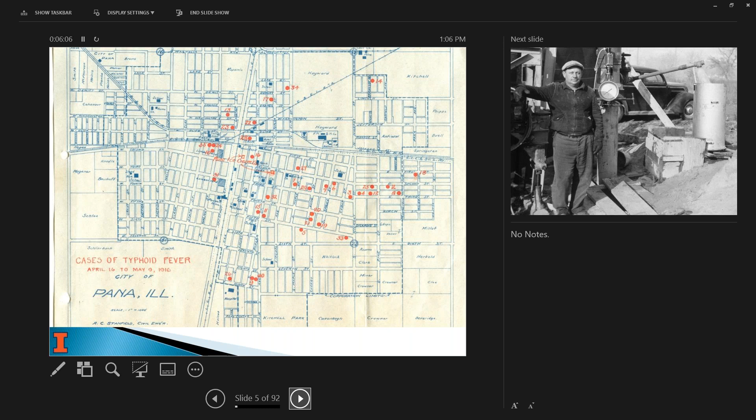And this particular thing, we investigated whether it was that half the system was sewered and the other half wasn't, or if it was their water system because they had a new treatment plant and they didn't put it online. And it turned out it was the Pana Ice Cream Company, which also sold milk. Back in that time, everyone went to one large vat, if you will, and used a shared bucket to get milk. And that's what caused the outbreak there. And all of that's identified in their files still today.

Just some other examples. I'm also in charge of our data management and outreach at the Water Survey, and we've been going through our files and scanning a lot of old photos and things that were happening. We've been involved with pump tests. Here we're using an orifice bucket to do a pump test, going back all the way into the teens.

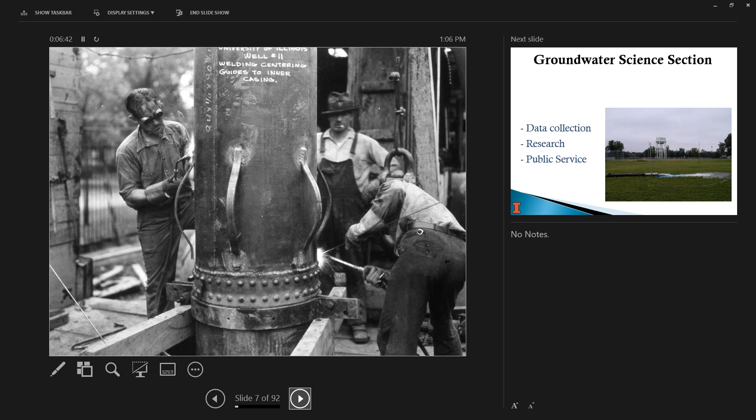This is putting spacers on in a well at the U of I in the 20s. A lot different job back then than it is today. Look at all those rivets and putting those on. So it's a different world today, surely, but we've got a background in that, and we still do pump tests and things like that for folks.

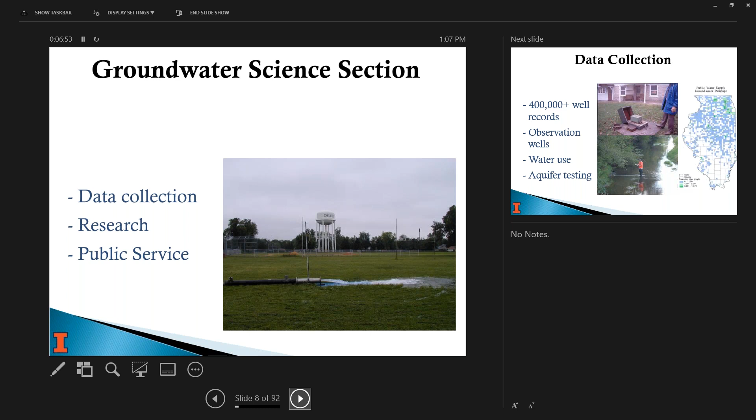I'm in the groundwater science section, so we not only collect data and do research, but we also provide public service. We house the state's water well logs, and so we have over 400,000 well records for the estimated 800,000 or so wells that are out there, both municipal and private. We also have observational networks where we monitor wells.

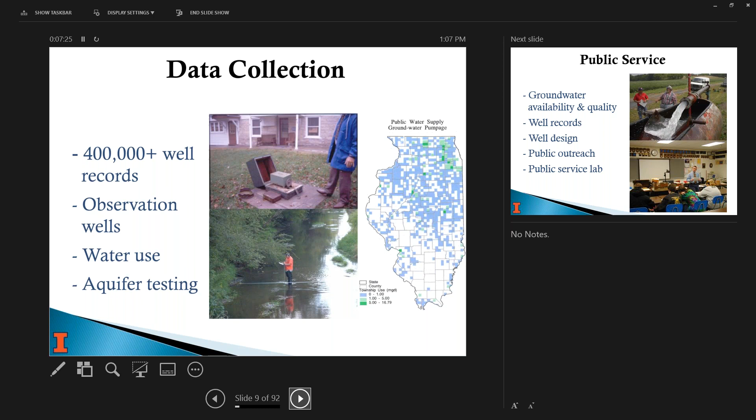We work with a lot of the communities in Illinois that measure their own water levels, and they provide that data to us. Illinois has a water inventory program that requires every municipal water supply to provide their annual water use to us. And we also provide services like aquifer testing and other things to help communities. We model, we do pump tests, a lot of public outreach.

And then on the research side, I mentioned modeling. Contaminant studies. The head of our section is a geochemist and has been involved in a lot of interesting groundwater work in that respect. But we look at well interference issues. We do aquifer assessment studies for communities and areas where they may want to put in a regional supply and things like that.

So we're in the game, if you will, and we run wateroperator.org through a grant from RCAP, the Rural Community Assistance Partnership, and it's funded through US EPA. And the goal behind wateroperator.org, and I'll get into that later, is to provide resources and support for systems under 10,000. And those tend to be the ones that are more out of compliance. And so on our side everything's free and publicly available. And the idea behind it is we're here to be a resource for you all as operators.

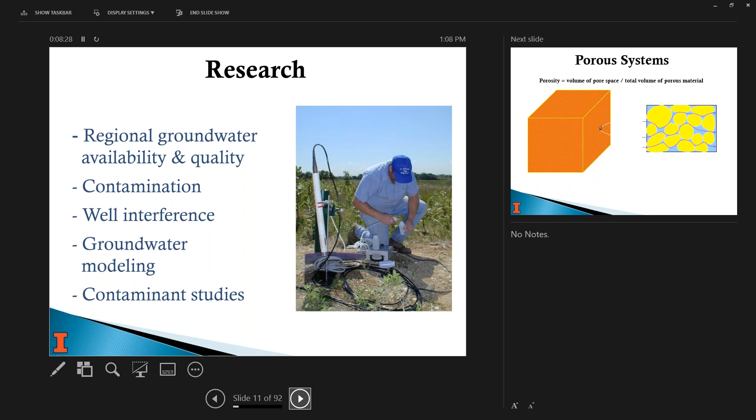So we're going to do a little groundwater 101. A couple things I want to explain. I work a lot with private well owners, as I mentioned. What's important is that you need to understand your well and your well system and the geology at your location where your well is well enough to ask the right questions, make sure that you're doing the right things, that you're not spending money unwisely for your community, all those things.

And so understanding the difference, for instance, between a porous system, which is sand and gravel, in an aquifer, and a fractured system is one of those issues, whether you have a bedrock well or a sand and gravel well. So a porous system like this, and this is just a diagram explaining that porosity is the amount of airspace between all the grains of sand in a sand and gravel aquifer. And in an aquifer, all those pore spaces are filled up with water.

So a really uniform sand may have a porosity of 30%, meaning 30% of that volume is actually water. So put that in real terms, if we have an aquifer that's 100 foot thick and it's full of water, whether it's artesian or whether it's water table, if you took all the sand away, you'd still have 30 feet of water over the entire expanse of that aquifer, which could be multiple counties, very large.

So sand and gravel aquifers are typically very productive. And that's why we see a lot of irrigation wells that pump 1,500 gallons a minute or so in sand and gravel, a lot of times in sandy areas along river bottoms and things like that.

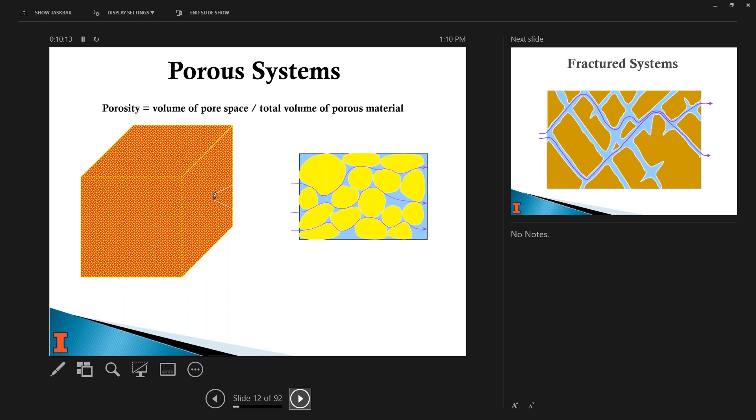So the difference with a bedrock well is sandstone has some secondary porosity where you may have some water in the actual rock, but for most fractured systems, most types of bedrock, the water's flowing through the cracks and fissures in the rock. It's not actually flowing through the rock.

So you can look at it like it's pipe flow, but it means two things. One, there could be much less water available because it's just in the fractures. And it also could mean water's coming from further away to get to your well if you're pumping at a high capacity, if there's only a few fractures.

I worked with a bunch of irrigators up in Kankakee County, Illinois, and you could tell on an aerial photo by where the trees were growing where the fractures were, because it was pretty close to the surface and they had enough water in those places. And they knew where to drill their wells for irrigation just by sight,

and they tried to line them all up on those fractures, because if they missed... I had one guy who told me he had his well, he called it his Cadillac well. He spent $55,000 on it for an irrigation well, and he only got about 40 gallons a minute when he was looking for 1,800, I think. So understanding the differences in fracture flow if you have a bedrock well, those things are important.

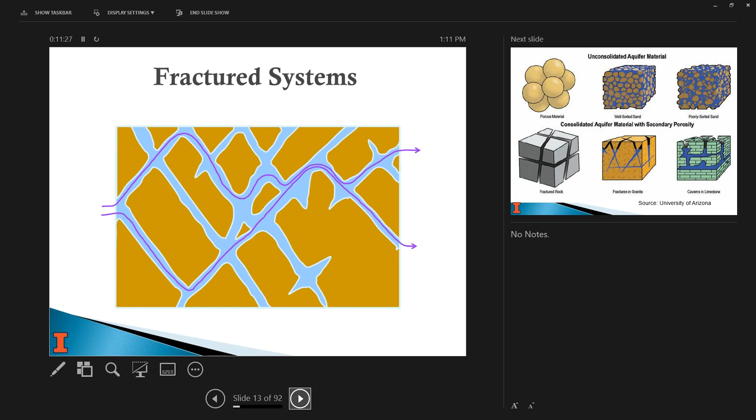So along all of our river systems, a number of communities have their wells in those sand bottoms, and that's alluvial sands. They tend to be graded by size because the bigger particles fall out first. And so at the very top of an alluvial aquifer, it's usually pretty fine sand. And sometimes, every time there's a flood, some of that can shift.

The porosity, if you will, there is less than 1% in some cases, whereas in Kentucky, Tennessee, all the areas with karst and dolomitic limestone, Mammoth Cave, all those places, sometimes you can have very large crevices in that rock because water over millions of years has eroded it away and created these large pools, filled tubes in the ground.

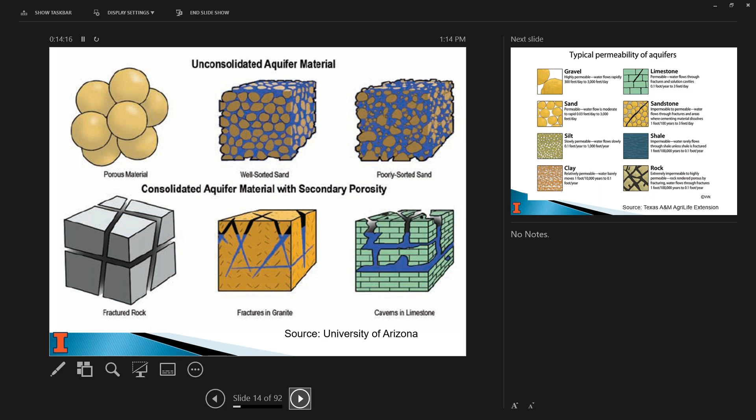And what's happened, like in Pike County, is they put in a regional water supply, and they supply water to a lot of areas, even out in the country, to private homes. So permeability is the other thing after porosity that is a big issue.

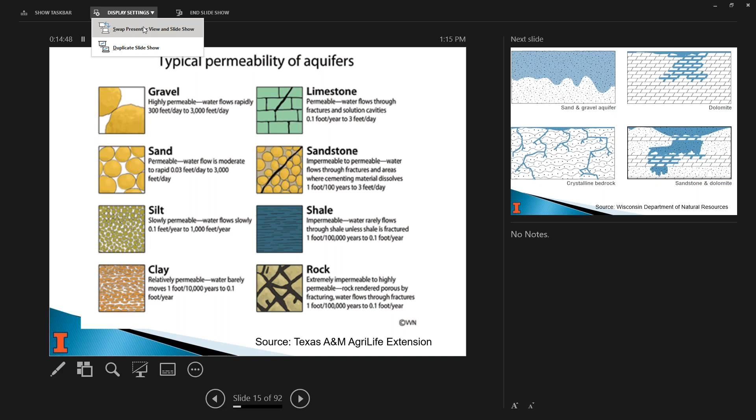Okay, Steve, I pause you for a second. Yeah. The screen that we're seeing right now as the audience is your PowerPoint's notes section. So I think you need to switch your screen so it shows the actual presentation rather than your notes. Oh, well, thank you for telling me. Right there. All right. Oh yeah, look at that. So one of the ways we've tried to alleviate the fact that I didn't have audio yesterday for a minute and a half was we moved upstairs to where we can hardwire our connection. So I'm not on my normal setup, and there's a second monitor hooked up, and clearly we had it on the wrong one. Thanks for telling me. Okay, sorry about the issue there. Does it look good now, Hideyuki? Yep, looks perfect. All right, thank you.

Okay, so permeability is the other factor that can affect how much water is available to your well, if you will. And so it's kind of a measure of velocity. It's not actually velocity, but it's similar in that it's measured in, here, feet per day. It's how fast water will flow, which, you know, the water flows based on head difference, it's pressure. So for the same kind of sand or the same jar of sand, if the difference in height of the water from point A to point B is more, the water will flow faster.

But highly permeable like gravel, it's because it's got large pore spaces and it's easy for water to get through. So as it shows here, it can move as much as 3,000 feet a day. Interestingly, silt and clay towards the bottom on the left side are also highly porous. They can have as much as 20 to 30% water in them, but the particles are so small, they're so hooked together, if you will, that in a clay water flows 1 foot in 10,000 years, or could flow that slow. And so those are considered not aquifers, but aquitards or aquicludes, because they prevent water from moving freely through those units towards a well.

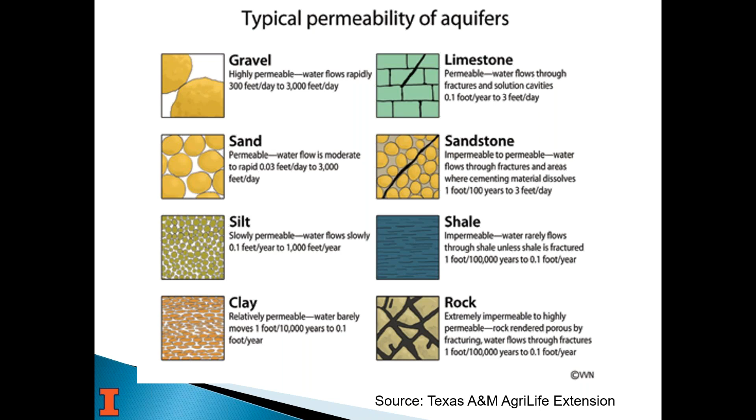And so we drilled through till that's so hard that the driller thought it was shale, and we hit bedrock and it turned out it wasn't. But shale is basically impermeable, and it acts as a barrier to water flow vertically down if there's an aquifer below that. And so recharge to a deeper aquifer below shale typically is really low. And so it's coming usually from the side somewhere at a distance away from the well. Okay.

These are just some basic examples. I show this because it gives you an idea of, if this was a horse trough full of that material and you poured a bucket of water over it, this is the wetting front you'd see going down through the material. And it's really just to show that in a sand and gravel, water's kind of just free flowing between all the grains.

But in crystalline bedrock, the granite, it's only going to flow through the fractures. And in the real world, this is still a simplified version with the sandstone and dolomite. Because the sandstone has secondary porosity, it may have some flow that's more sand-like, but you usually don't have just that one unit.

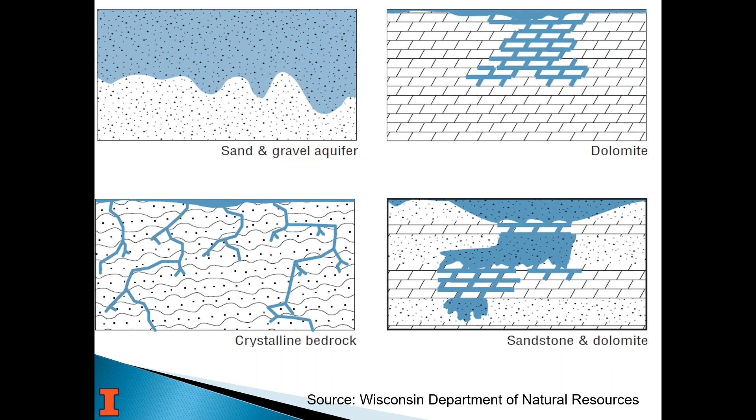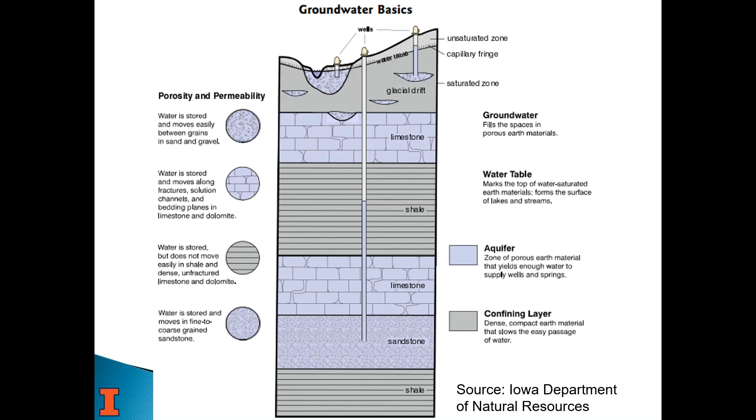And that's the other thing. A lot of times, whenever you get into bedrock, sometimes you're finishing a well in multiple units. And that can be a problem. Sometimes one of those units has a different water chemistry than the other.

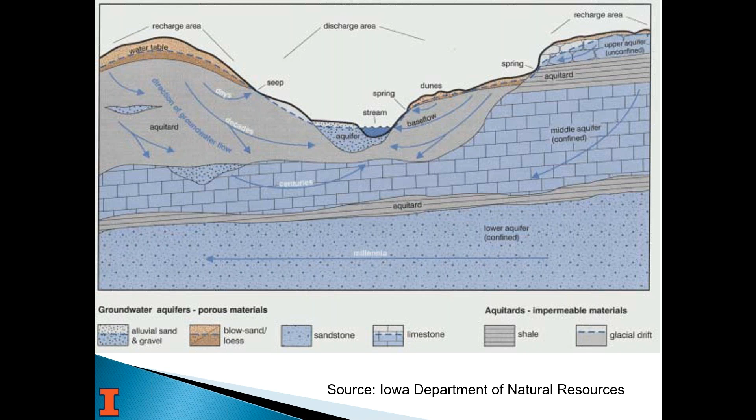And some of you, I'm sure, are aware of where those are if you're in a sandy area and you've got groundwater protection areas in some places. But this is a good overview of the type of time frame it takes for water to move through the system, depending on how deep it can get and those things.

So a little bit about, and I debated whether or not to talk about dug or bored wells. Obviously, none of you as community water supplies have dug or bored wells. But this is also in the class as well; the original class we developed was originally for non-community water systems, which many times are very small systems, a restaurant, a campground, where they may have a dug or bored well. And since those folks might be on this, I decided to include it. Plus, it's good for you to know the differences.

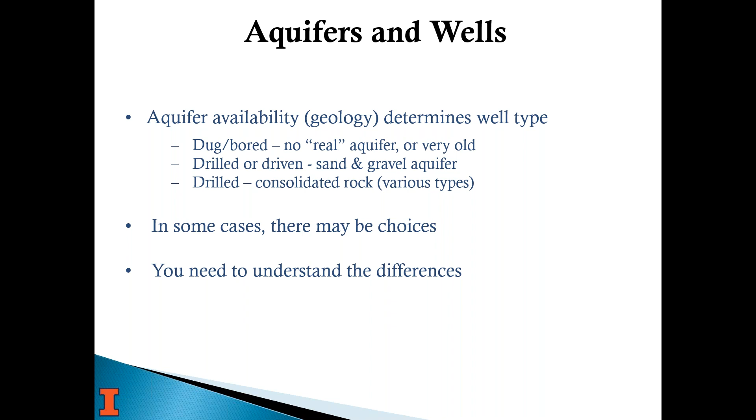So, it really depends on your geology. You may have choices. Champaign County, where I live, there are at least 2 sand and gravel aquifers at different depths before you hit bedrock. And then you can also put a well in bedrock if you wanted to. Most people do not do that. There's no reason to go that deep and spend the extra money. But anyway, it really just depends on where you're at, but understanding the differences is important.

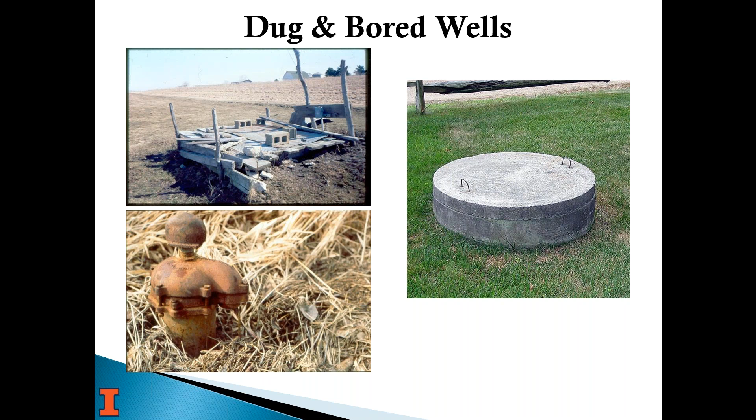And we see a lot of, in the upper left picture, really old hand dug wells that are still in use today. And the biggest problem with those is they're not up to any kind of code. And so if they're close to anything else, they can be a source of contamination.

Here's two examples. The picture that had the concrete tile on the top is the one on the left, and the one that looked like a normal drilled well is the one on the right. But down below, they're 3-foot diameter, usually 36-inch diameter. Sometimes now they're put in with Teflon, but they're meant to store water from the water table. So water's coming in from a pretty shallow place.

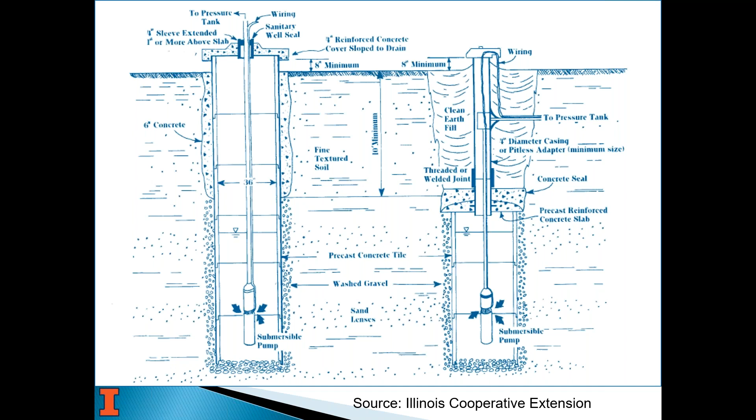As far as sand and gravel wells, the real issue here is if you have a sand and gravel well, your water's coming in through a screen. And if you have a bedrock well, it's more than likely open hole. So the difference is for a community well, maybe you have 20 or 40 feet of screen, where a private well may only have 4 or 5 feet of screen, that's the interval where water's coming into the well.

So the wells like Illinois American has here in Champaign County for Champaign-Urbana, they've drilled down, and I think they're 40-foot screens. I'm not 100% sure, but those are at, say, 200-foot depth. And so water's only coming in from 160 to 200, and the rest is solid pipe above that. The screen size is based on the drill cuttings and the actual aquifer material, what size sand or gravel might be there. And that's usually determined by the driller whenever they're putting in the well.

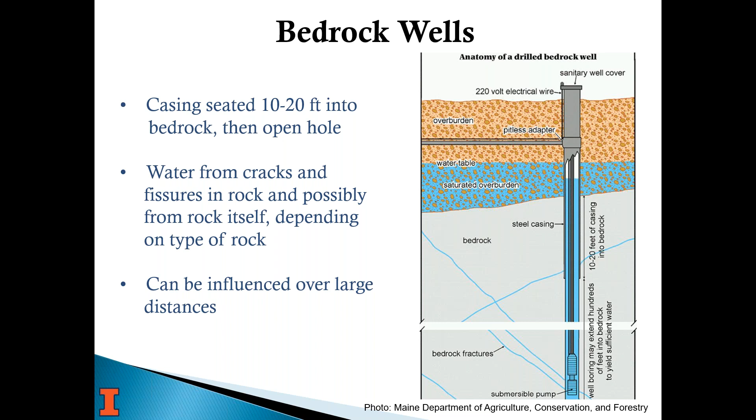What that means too, though, is if it's not well fractured, or there aren't a lot of interconnected fractures, the water may be coming from just a few fractures, and that means it's probably coming over a longer distance. So your chemistry can change, or some of these fractures may head towards the surface. Depending on your geology and how much overburden you have, it's good just to understand some of those risks. And I know as community water supplies, you're sampling frequently, so you're probably aware if there's any of those issues.

I've seen wells in New York State, before they had to meet code, that maybe have 15 or 20 feet of casing, if that, and they're 300 or 400-foot wells, but the bedrock's right at the surface in some areas. And so we see a lot of contamination in some of those bedrock wells, even though if you ask somebody, they'd say, well, I've got a 500-foot well. Yeah, but it's drawing water from 15 feet below land surface.

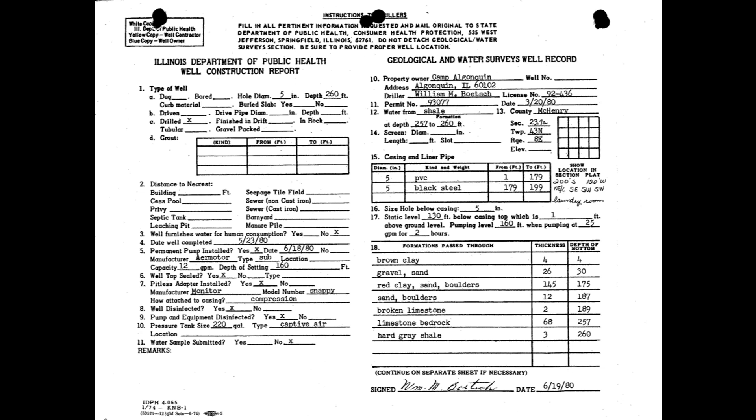I don't want to show Illinois per se, but it's a good example. So there are resource agencies in your state, whether that be your state geological survey, DNR, DEQ, a lot of different names, or even your USGS state office, that have mapped, monitored, and studied the aquifers in your state.

And as they melted, boulders fall out first, gravel falls out next, then sand, and then silt and clay. And then another glacier comes along and it deposits a second level and then a third level. And so these buried bedrock valleys that used to be rivers are now full of sand, and they become our major sand and gravel aquifers. And that's going to be true in any glaciated area of the country. So the northern third of the country, if you will.

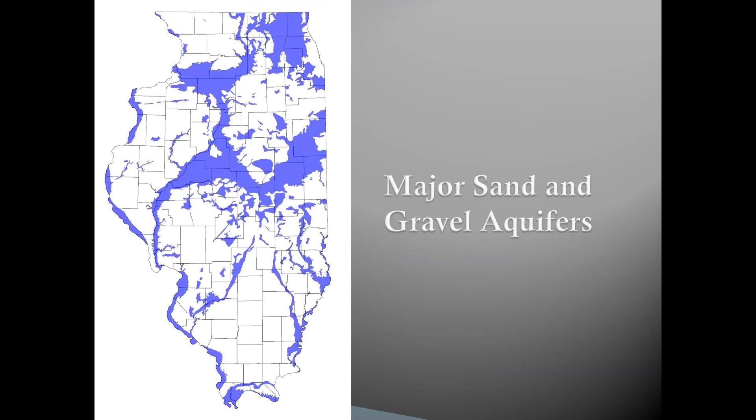Otherwise, the only other sand and gravels would likely be along river bottoms today, where those areas have alluvial sand that's been deposited from flooding and just movement and all those things. So I bring that up because all this information is useful if you're in these areas. So for instance, going back to this other figure, the Mississippi now runs along the left edge of Illinois. That's our boundary. But before glaciation, the Mississippi didn't run along the state boundary today. It ran over through down to Peoria, where the Illinois River is today.

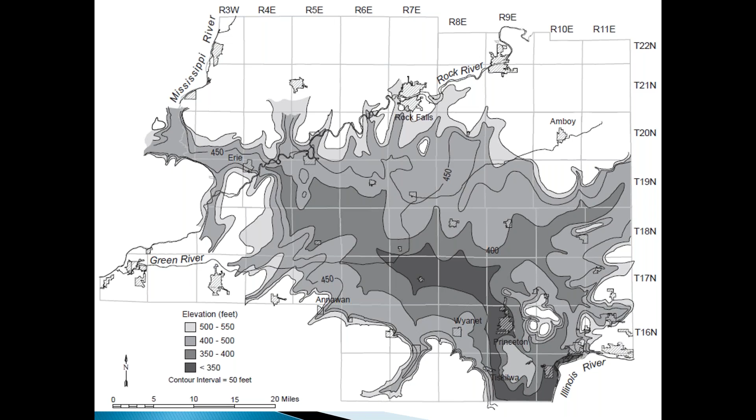And so groups like ours and the USGS and the state's geological surveys have mapped all this. They can give you information, water chemistry data for the aquifers. We work in cooperation with the communities in Illinois that measure water level data, provide some of that to us, and that helps us understand what's going on. And so we can produce products like this that actually can benefit everybody.

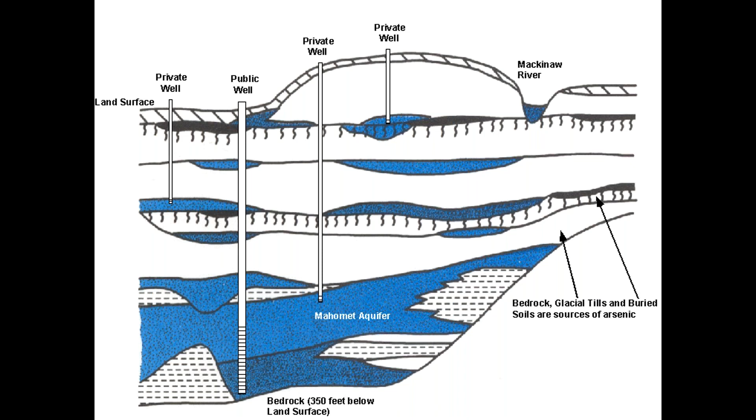And so you should develop a relationship with those folks is kind of my message, because there's a lot of good information there. And for instance, many of you maybe have consultants that do all that stuff for you. We have consultants contact us every day for well information, water chemistry information, and they're doing that on behalf of communities in most cases. But my message is it's good for you to know some of this stuff as well and not just rely on the folks, so you understand it better and you understand what's going on.

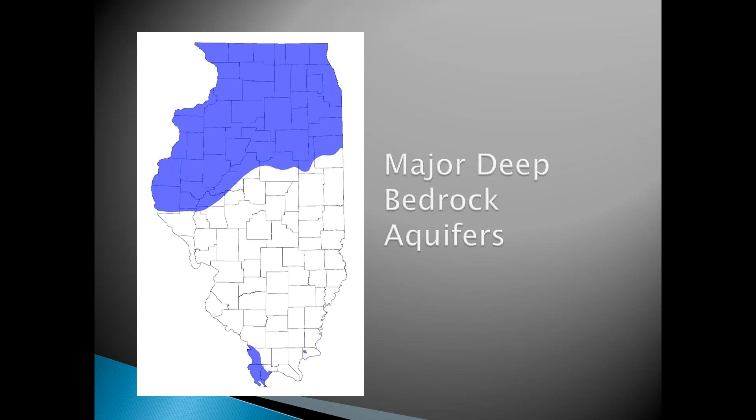And I mentioned we have bedrock aquifers, and we have a deep bedrock aquifer. In the Chicago area, they pump out of a deep sandstone there that's in some places over 1,800 feet deep, where in other areas of the state, we may have some communities along river bottoms that have 30-foot, 40-foot wells.

Think of it like if you poured a glass of water on a table. If I pour it on the left end of the table and then I pick the left end up, where does the water run? It runs downhill. The same way if I have a juice box and I squeeze it, what happens?

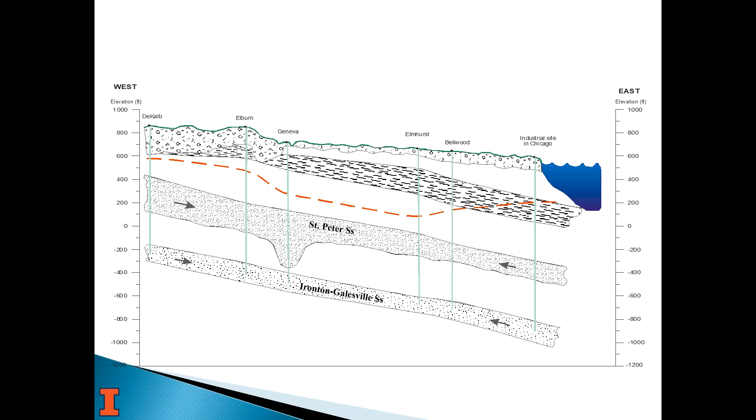Yeah, and that's a really good point. And just like even the Mahomet here that's buried, and the Glasford, which is the shallower aquifer, Glasford's a town along the Illinois River, and Mahomet's just 15 miles west of Champaign. And so geologists, when they named all that stuff back in the day, had a way of using where they could find materials to actually identify and catalog. So yeah, pretty cool. Thanks, Dick.

Aquifers versus aquitards. So an aquifer is a saturated unit, sand and gravel, or rock formation that yields water of sufficient quantity. This is actually an argument among scientists and hydrologists and geologists about what is and what isn't an aquifer. Well, let me go further here. An aquitard is something that won't yield water. So it's clay, silt, granite most of the time. You might have a private well in granite, but you're very unlikely to have a community well or a large capacity well that's in that kind of material.

So in that case, granite can be both, depending on your need. And that's what it comes down to. Different users or uses will define what an aquifer is or is not. We have even water table wells or dug and bored wells. Some people would say, well, they're in an aquifer then because they've got a sufficient supply for their home.

Well, it could be a 3 or 4 inch sand stringer in an otherwise glacial till that provides just enough water for a few folks on private wells. That won't supply a community water supply. And so really the bottom line is an aquifer usually has a large quantity of water available, but that definition is kind of really up in the air depending on what your needs are.

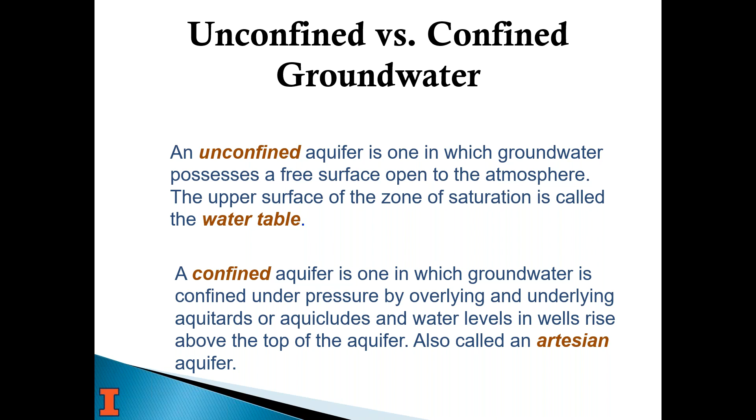And so when you pump water out, or for some other reason there's water that's at a higher elevation, it's going to try to level the whole thing out and make the pressure head the same everywhere. And in a confined aquifer, that's why you see water levels rising in wells, and that's why it's called artesian. And I think we just showed an example, and maybe I'm going to show that again in a minute, but artesian doesn't mean flowing. Artesian means it's under pressure greater than 1, which is atmospheric pressure. It could be a flowing well, and that is also artesian, but artesian doesn't necessarily mean it's flowing.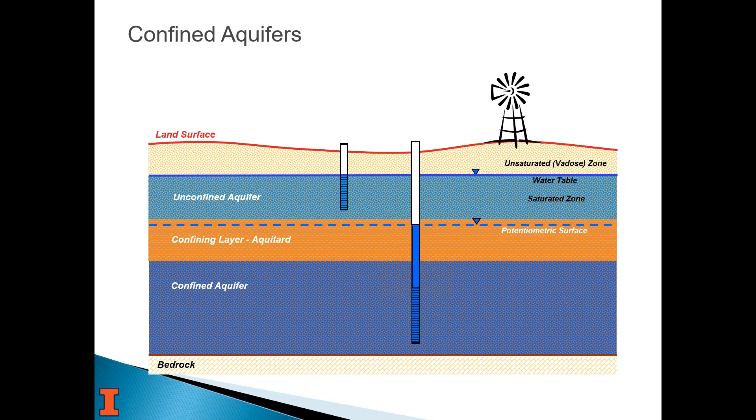Whereas in a confined aquifer situation, usually the confined aquifer is below some kind of confining layer, an aquitard, and so they can have totally different water levels versus the water table. So in this case, the upper unit of sand has the solid line water table, and a potentiometric surface, which is a pressure head, because all that confined aquifer down below is completely saturated, but it's also under pressure that makes the water level in that well rise to that level. And that's because somewhere else in the aquifer, the water level is at least that high, if not higher, and it's pushing to lift that water up.

Yeah, so confined aquifers versus artesian wells. I borrowed this slide, so bear with me. So you can have an aquifer where the water level is above the top of the aquifer. That's artesian, and it's under pressure. The water table is completely different because it's between a confining layer. It can be higher or lower, I guess is the message there. It's really independent of the water table. And if there's enough pressure, then it will flow. And that's the situation we have in some places.

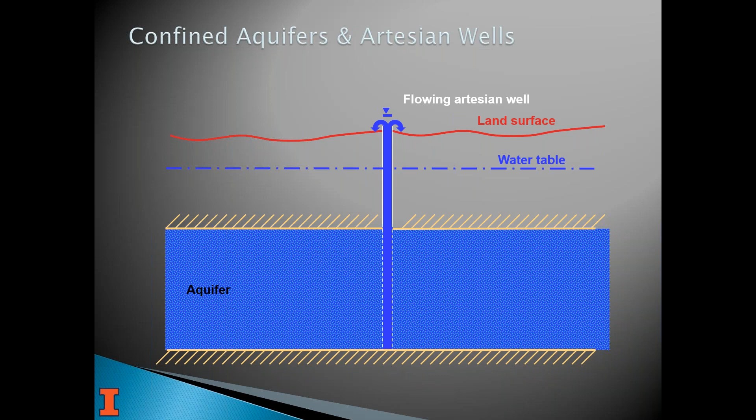I think there's a question someone asked about flowing wells, and I have some more information to provide in that segment when we get to the end. So just showing this again, flowing well versus a non-flowing artesian well is really just based on how high the well casing goes. If the land surface were lower on the right side, that well might be flowing as well. It's based on the pressure head of the water in the aquifer because of the recharge area that's kind of pushing the water up.

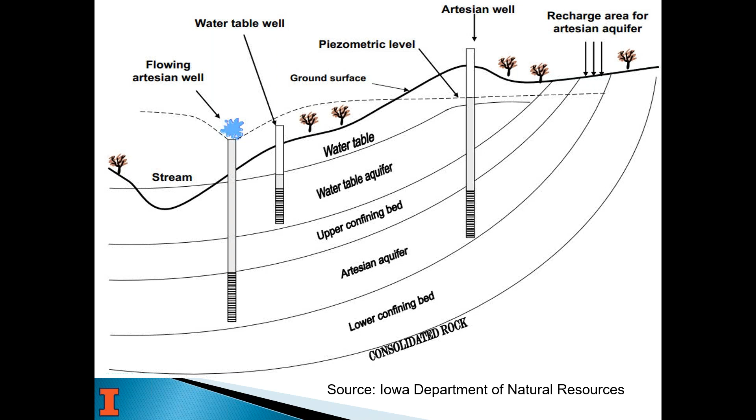And the other part is when you pump, what happens? So this is where permeability and porosity come in. There's two distinct figures here. One is a cross section at the top. So it's like we slice through the well in the middle and we're looking into the well from the side. And the other one's from above, and those are elevation lines.

So at the pumping well, it's 410 feet above MSL, the water level in the well. The water level is always going to be lowest in the well where you're pumping. And then away from the well, it's going to go back to a certain point where the well doesn't influence the aquifer anymore. And that's this cone of depression.

And so you can see in an ideal situation, which we don't have typically, where the sand is uniform, it's going to be very uniform circles. It's going to look just like this. The distance between the circles is going to be the same, and there's no other influences. How wide and how deep this goes depend on how much water is available and what the permeability is, which means how fast can the water get back in to fill in. It's trying to fill in to be level again.

And when you're pumping, you lower the water level in the well, and that creates a head difference. And so water's flowing towards the well, kind of like pulling the plug on a drain in your bathtub again. So the size and the magnitude of this is totally dependent on the amount of water available, the thickness of your aquifer, saturated thickness, and the permeability and porosity, so how much water is really available.

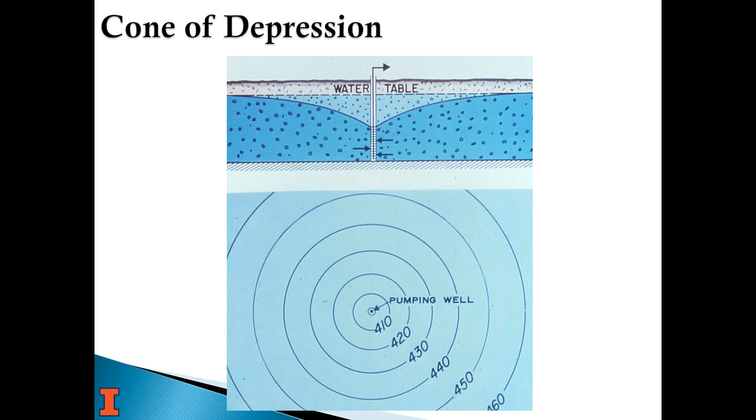So you can cause different things to happen if you have a well field. If they're too close together... usually you're spacing wells, it's one of the things that we've provided in the past to communities when they want to put in a well field, is we'll help them design how far apart they should be so that you don't have this well interference between wells. But you can see what that looks like with the water level surface on the bottom.

A well is trying to draw from 360 degrees around it. It's taking water in from all directions. So having another well somewhere means in that direction they're competing for the same water, so to speak.

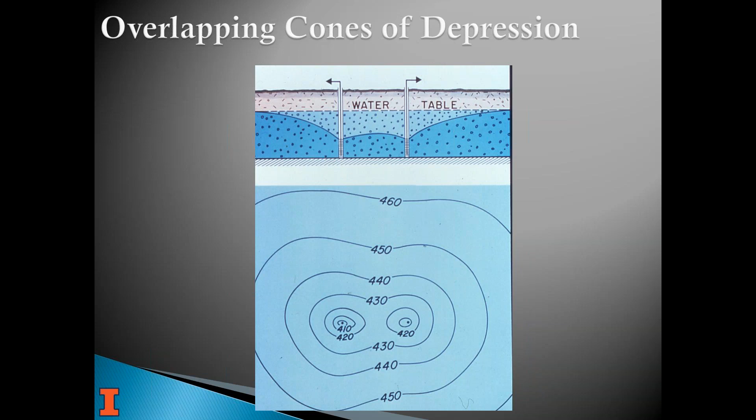And if you're near a boundary, then you have other issues. Again, there's not as much water available because you're on the edge of the aquifer. And so it's going to cause a non-uniform distribution of drawdown because it's taking more water out of the storage of the aquifer, because it's just not available because of the boundary there.

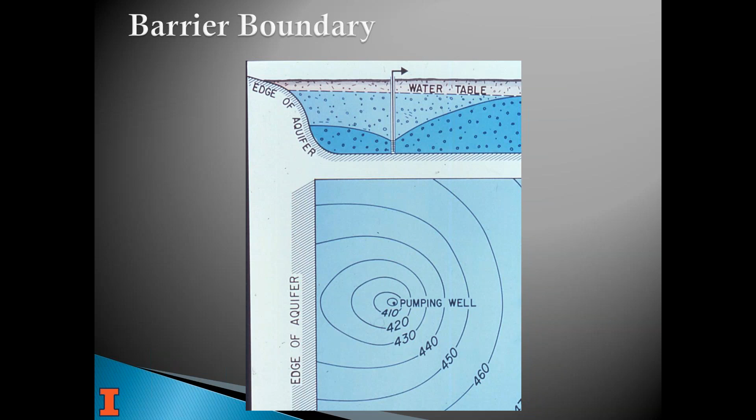In the same way, if you have a constant head, a river, and you're pumping, you can pump a lot more closer to the river because it's going to keep adding water into the aquifer if it's connected hydraulically, and cause less drawdown over a shorter distance because of that. And the river acts as a boundary.

So you can see on the picture on the bottom here that on the right side of the river, the water levels are doing what they typically do. And this is in a typical groundwater system. Like if you look up at the top on the right side of the river, you see how there's a dotted line that shows that eventually the river is the surface elevation of the aquifer.

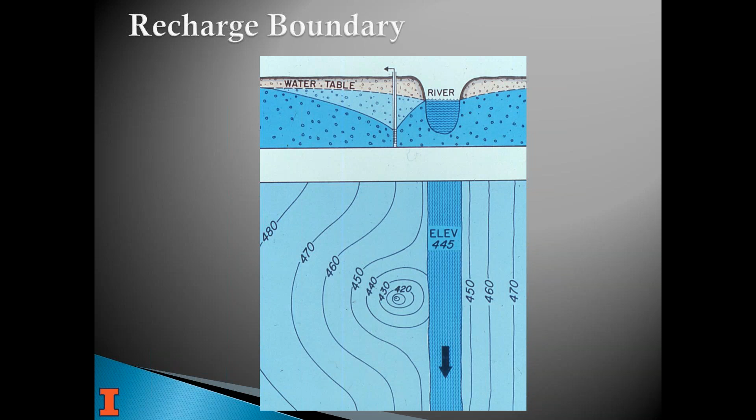And that's what you have in most situations along rivers, is the higher head is moving towards lower head. And so in this case, water in the aquifer is moving towards the river and discharging into it because it's at a lower elevation and it's constant.

Some other things I wanted to bring up that you need to consider. I'm downstate, but we have the Chicago area, which is 6 million people and growing. And we look at water use because communities are required to provide us that information every year. And then we also have all the information on the thickness, past drawdown, pumping tests from the bedrock aquifers, the deep and shallow up there.

And so we were able to put together, this is probably 15, 20 years ago we put these together, and it's worse today, the estimated yield of the aquifer, at what percentage of the yield is in use already.

So there is a problem in the Chicago area. One of the largest pumpers today is the city of Joliet. And I know there's a lot of folks working both at the State Water Survey and with the city of Joliet and some of its neighbors and the people they provide water to look at options for trying to do something different, because the water levels in the deep aquifer there are going down, and eventually they're going to run out of water. And so they need to find an alternate source. And it's estimated from the modeling we've done that'll happen in 2030.

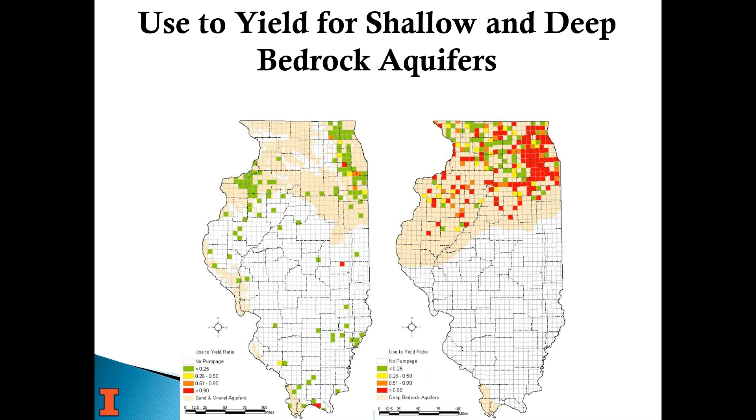And so understanding this information, if you plan to grow as a community, and if you already have a marginal water supply for the people you have and you want to draw business in, you need to have an idea of where you stand and how much water is available from your aquifer, if you're ever going to have any issues with that or competition for water. In some parts of the country, obviously there's a lot of competition for water already out west, and there's a lot more rules in place than there are in Illinois and some of the states east of the Mississippi. But it's just information that will help you understand how to protect the future of your community water supply.

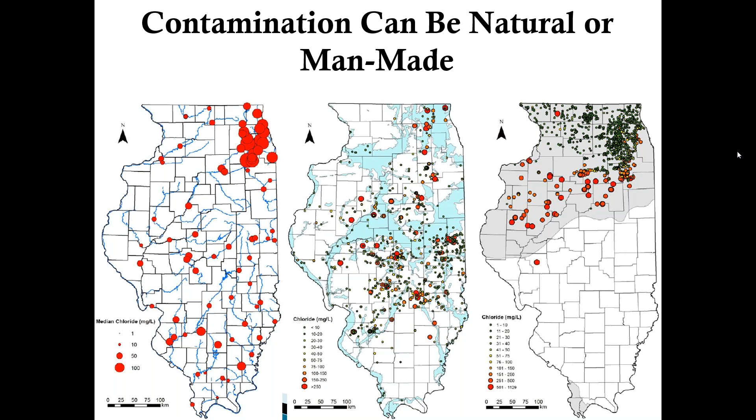And I just wanted to point that out. So that's what I have on groundwater and wells today. I'll bring up our class in a few minutes and then talk more about that, but I want to talk a little bit about wateroperator.org. Many of you probably have not heard of it in the past. Hopefully some of you have.

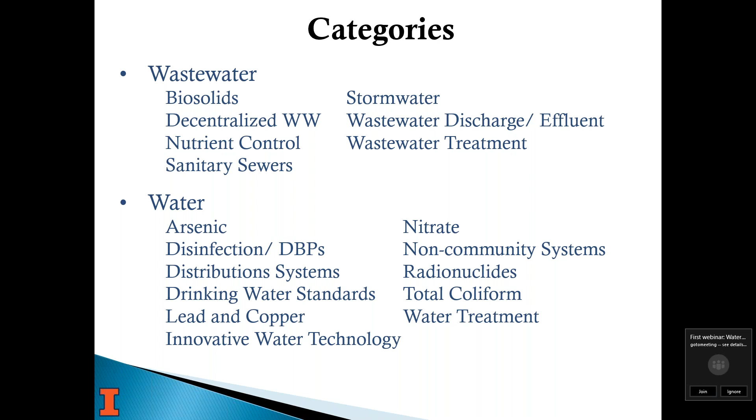And you can see the categories we've broken these into. There's only 32 categories and there's 15,000 documents. So some of them have quite a few documents anyway. So you need to try to find a way to narrow that down.

But there's also things on safety, utility management, financial management. Every topic that could interest you as a water or wastewater operator, we've tried to cover it. And if you can't find something, again, email us or call us. I had an operator call this morning and I showed him part of the site because he was looking for a certain thing and I just walked him through it. It's a really good resource.

So what we did with the operators in Illinois, one of the things we used to help solve their arsenic problems is that arsenic co-precipitates with iron, at least it does in the groundwater in Illinois. So for a few systems, their solution was to actually add iron, even though they already had high iron, to help remove more arsenic. It means they backflush a little more often, but it was a way to actually use their current system to remove the arsenic they needed to remove.

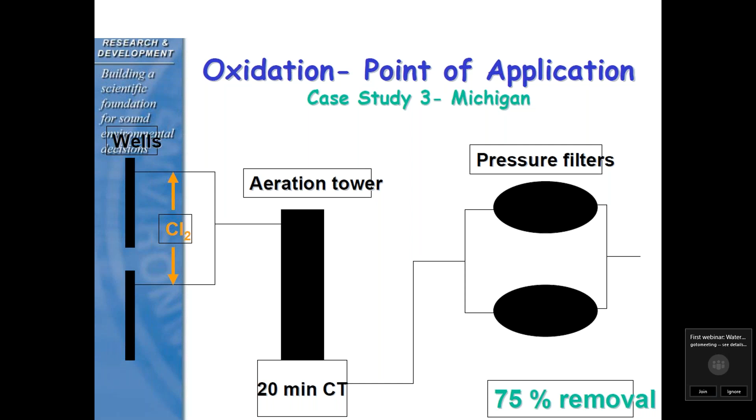But they realized that if they put it back where the water is coming out of the ground and let it run through the whole system, now for the same chlorine, the same cost, the same everything, they're getting 75% arsenic removal versus 50% just because of the added contact time. And so it's things like that that they've been able to research that are practical. If you find this information and it fits your need, or if you need help finding that, we can help you. But this is freely available on their website, and so we link to it.

Lastly, I want to talk about, so this webinar is called Groundwater and Wells, or Groundwater and Well Care. It's based on a class we have. This started out as a non-community class. It turns out, most non-community water systems, if they are their own water system, it's because they have a well. And in many cases, if it's a campground or a restaurant or a small business that's in the country, or even a school, they're not in the business of being a water purveyor. They have their own business or their own thing to do, and their well's very much like a private well.

So we put together this class initially for non-community water systems, and then realized that it was also beneficial to community water supplies and all public water supplies. So we went and made it that way, so to speak. So it's basically groundwater and wells.

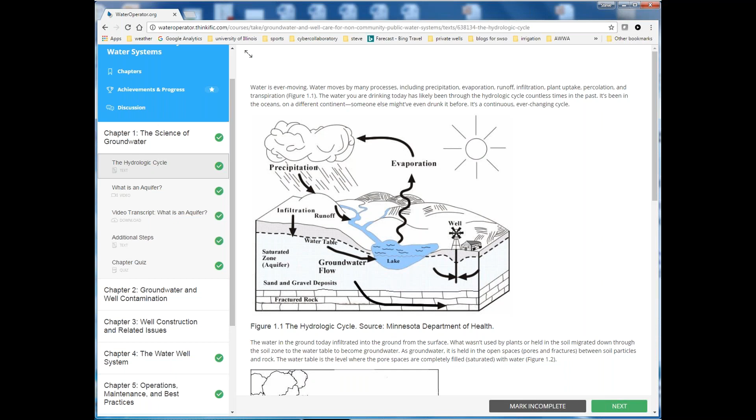But the idea here is really to help folks understand groundwater in their well better. So that's available on our website as well, and you can email us if you have questions. Well, this is what the class looks like. It's 6 chapters all together. Like I said, it's either 2 or 1 hour. It is pretty basic coming in as a groundwater hydrologist, but it gives you all the concepts that you need to understand groundwater flow and all those things.

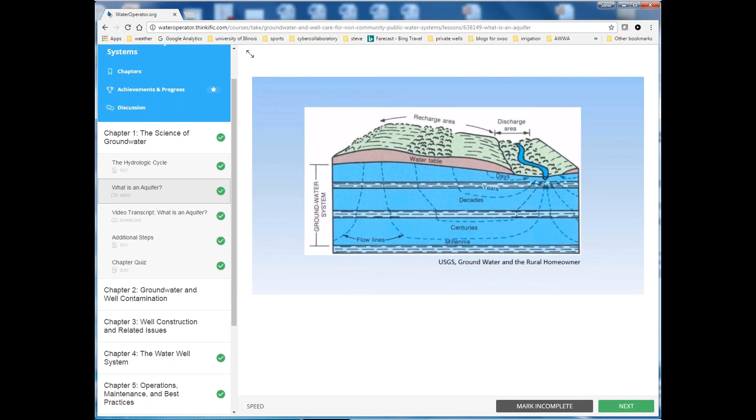And I've used different examples today, but the same issue with how flow works and how long water can flow through the system, groundwater kind of is lost in that. And so when you're done, after you've done all 6, you have to take a quiz. I think there's a few questions at the end of each section, but then at the end you have to take a bigger quiz. And if you complete that, you get a certificate. And again, if you're in one of those states, you can use that with them. It's actually the only class we have.

We're not in the business of being a trainer. We're in the business of trying to help you all find training you need from other purveyors and to make sure that you are aware of all the possible trainings that are available in your state. But this is a niche for us, mainly because we're groundwater people. And so when we were asked to set this up, we decided we'd go ahead and do it.

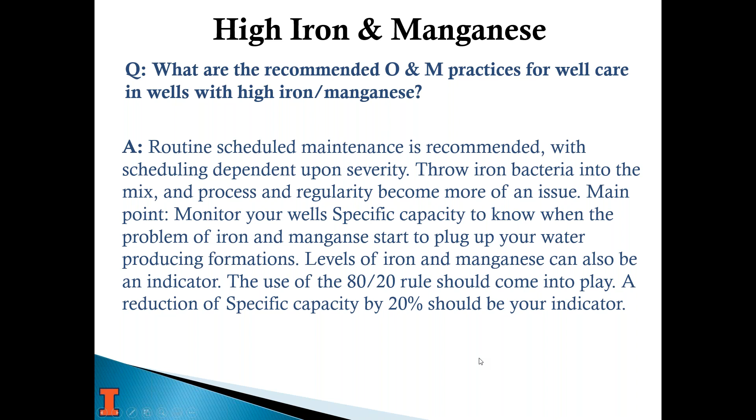Period. All right. Thanks, Dick. I'll make sure I didn't just skip one.

No, good deal. Okay. So what are the best methods to troubleshoot a well that has developed variable GPM and quality of water produced, to determine if it's a pump, screen, or quantity of water problem? Well, this is actually a segue from the last question right into this one. And again, watching what your water quality levels have done.

Sometimes when we rehab a well, the operator will put the equipment back online, and they'll find that they have elevated levels of chlorine or free chlorine in the system, and they want to know what's going on. Well, the reason is that the well was plugged so bad that you were pumping high levels of iron, or maybe throw some ammonia into the mix to really mess things up. And after the well's rehabbed, you're getting that better quality water, and you don't need as much chlorine. So you want to really keep track of your water quality levels.

Keeping track of your performance is a must. Too many times we have a client that says, "Oh, my pump's broke down." We go out and we ask them, well, what are your records? What's been happening? And they're like, "Well, we don't keep any records." And that's the tough part, because we come in and we'll do the work, put the pump back in, fix the broken shaft or fix the burned out motor. And after you put the pump back in, we'll find that the well has a very bad specific capacity problem. So you've lost all that time of removal of the pump.

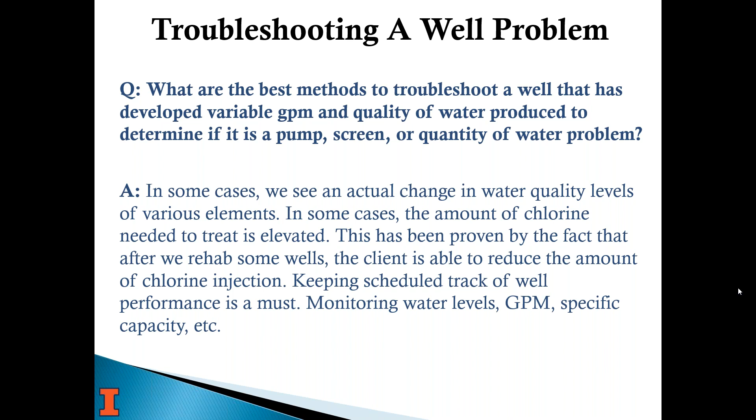Okay. So at what frequency should wells be cleaned and inspected? All right. People always ask that question. How long does your pumping equipment last? How often do I have to pull the well?

With father and grandfather back to 1916, we've always used 7 to 10 years as a pretty good guess. We have some clients that do something every 5 years. We have others where you can pull a pump after 20 years and you can still see the stenciling on the pipe. So much of that is dependent upon what your water quality is.

Again, getting back to your history, what has been the history of the well? When do the holes develop in the column pipe that you've got to pull it? When does the specific capacity drop to a point that I need to do something? Am I drawing suction? Again, the 80-20 rule is a good thing. Sometimes your insurance companies will dictate.

We have a client that has 5 wells and he pulls 1 well every year and rotates. And he has never had a breakdown. You can say that he's maybe investing his money unwisely, but I guess he's sleeping well at night with how he does it. Period.

So yeah, I was going to ask, when you said 7 to 10 years, I mean, you already answered it, I guess, but it is really based on chemistry, because we see the same things with private wells. We see some that could last 60 years, where that's not the case in some areas. So interesting. Yeah, house wells. It's not uncommon to have one that's been in for 20 or 30 years.

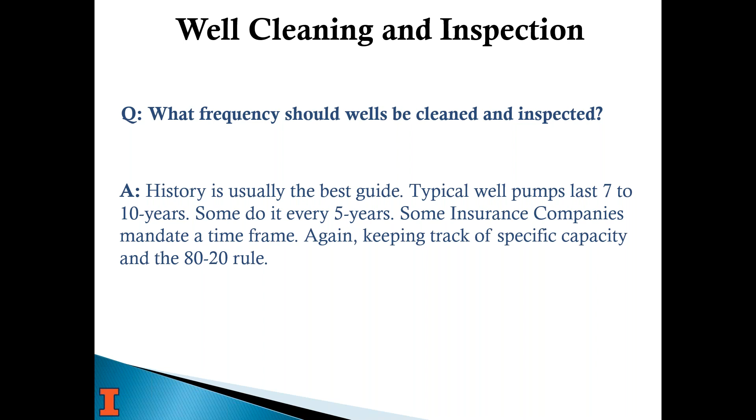Yeah. Bless them. I actually had a coworker who bought a house, and it's the original pump from like the 60s, and he just replaced it. So pretty fortunate. All right.

Well contamination remediation. I threw this in. I figured we could talk about it a little bit because what you said as an answer is certainly correct. I don't know if you want to elaborate, but it's pretty wide open. Yeah, it is pretty wide open. With residential wells, we're typically looking at either septic field type infiltration, or in Wisconsin, even some Illinois areas, we run into arsenic issues, and you run into chemical spills, or someplace near factories where they haven't done things so well in the past and done some disposal.

So a lot of that is dependent upon what the element or the problem is, to try to find out where it's coming from. So you really gotta watch, what is the contamination? Is it a fuel spill? Is it a landfill? Is it chemical? Is it arsenic from years of too much fertilizer on the farm fields? You just don't know what it could be. Sure. I think that's enough said. Those are specific issues, and we as an agency stay out of most of the remediation stuff. There are others much more involved in that, and it's kind of a specialty.

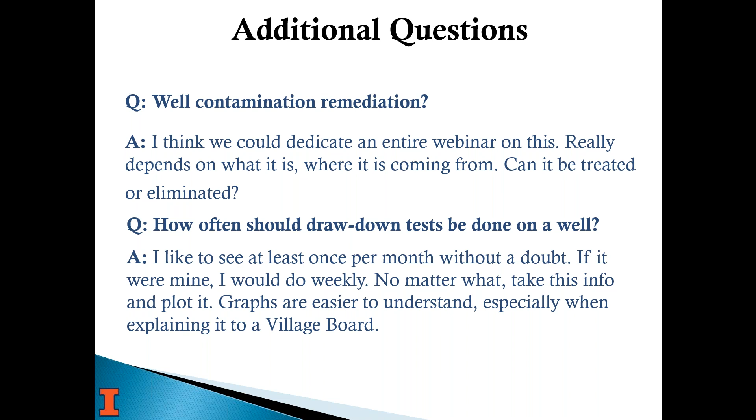So, yeah. And nowadays, a lot of our monitoring well networks around the state have telemetry on so that we can put them up. We have hourly readings, and you can go back and look at what's been going on just an hour ago, even from 4 hours away. It's kind of cool. Okay.

So artesian wells have been discussed, and this is Dick's answer that's written here. Please explain how an artesian well operates differently from a standard well. It doesn't, and I'm going to go ahead and answer this, Dick, because I wanted to show this handbook. Go for it. What Dick said here is really the static level is just above land surface, and we've already shown how that is. There's only some places where wells flow.

This handbook from Michigan, the Flowing Well Handbook, and I can get folks this book if they're interested. It's got some cool stuff in it. It's got diagrams showing how you cap a well that's flowing and all those things. Michigan was losing 28 million gallons a day of groundwater to flowing wells, and so they passed a law or rule that requires you to cap them now.

What's cool in this book is in the appendices, it's got things like how to calculate the flow based on how high the water comes up out of the well and the diameter of the pipe. And there's a horizontal one, and there's diagrams in it. It's mostly for private wells, which I won't talk about anymore. But it's pretty interesting to look through, especially if you have a flowing well for your supply.

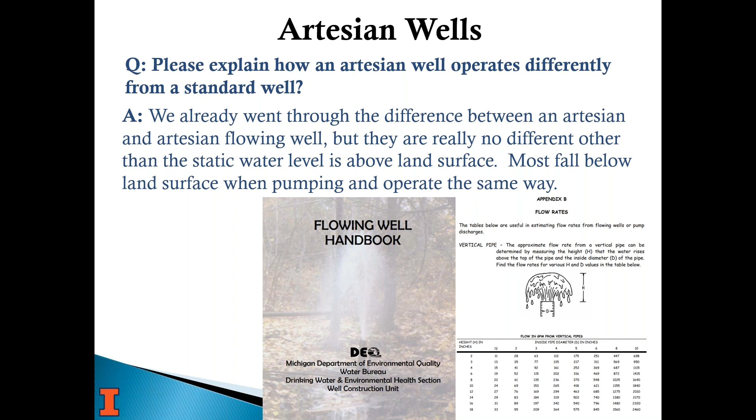But yeah, I think the most important message that you gave, Dick, is that even if it is a flowing well, once you start pumping it, the pumping level is usually well below land surface. Would that be fair to say? That'd be very fair to say. All right.

So there was a question, is there a way to tell if a well is under the influence of surface water besides MPA testing? Which is, I had to look this up, to be honest, microscopic particulate analysis. What I found basically is that it really depends on your state, what they're using for the rules to decide. And I understand this question may not have been what do I have to do, but are there other ways for me to determine? And there's really probably two.

One is you can look at the differences in the chemistry, because groundwater chemistry is different than surface water chemistry. Matter of fact, when I give a sample to our lab, if it's a surface water sample, sometimes they'll come back and say, hey, this isn't a groundwater sample. We know this is surface water. It's just by the constituents and the way the chemistry is, it's completely oxidized, all that sort of stuff.

And the other thing you can do is tell if it's connected. It doesn't necessarily mean that it's under the influence as far as pathogens and things like that. But if it's hydraulically connected, then you'll see the water levels mimic the river stage or the water body a little closer.

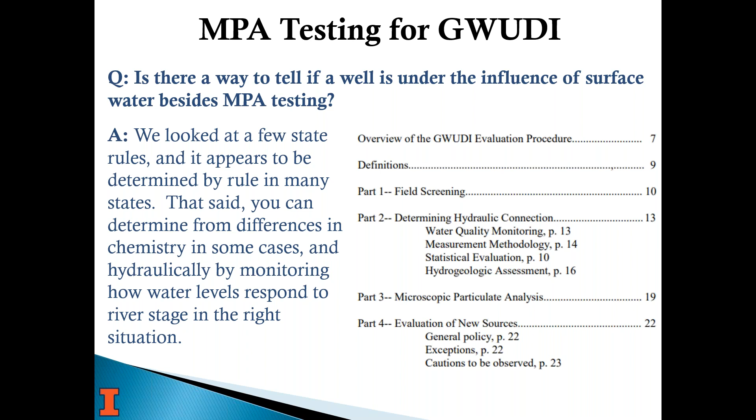But if you're really asking for your own benefit, I think the other two ways could both be helpful. If you want more information about that, I can dig into it more, because I had to look up what MPA was, to be honest. And so, yeah.

Is there a good way to tell if the drinking water is impacted by a septic system? And is there a good way to tell the difference between ag impacts, say manure spreading, and a septic system impact? So there really isn't a simple way to distinguish between manure and septic, other than you'd have to look at the type of pathogens. And there are approaches that are being developed.

I know there was a guy on the U of I campus who was able to use certain kind of testing to determine if the bacteria were from a cow, a horse, a pig, in a karst area where they were trying to figure out what was causing their bacteria problems in some private wells in an area. But that's expensive and not common, and certainly probably not accepted.

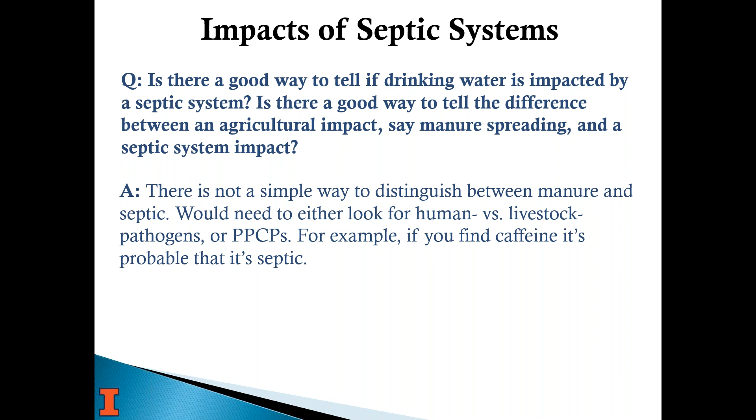One of the things that was recommended to me was a good way to look for human, or if it's human pathogens, if you look for those, or pharmaceuticals and personal care products. And a great example, if you find caffeine in the result, then it's probably septic, if that's what you're trying to distinguish. Or you can look at some other constituent too that would be very common. Caffeine's got to be one of the more common ones, though. So it was a great idea, and that was suggested by Walt Kelly.

How important is it for a small water system to have a secondary water source? So about 15 years ago, when the U of I and the Water Survey were involved with the Midwest Technology Assistance Center, we looked at all the small systems in the state and found 73 that didn't have a second well or some other secondary source of water. And really, I was surprised by that many.

And if your pump fails today, especially when you think about the COVID issue we're in right now, if your pump fails, how long before you have water again? Your supplier may not be able to supply everything you need. Your contractor may not be able to come out, or may have rules in place for their staff that don't allow that. And really, it comes down to you need to decide as a community, can your residents and businesses accept those kind of possibilities?

And I realize this is probably a very small town. I don't know for sure because those are anonymous questions. But I would say that it's really of the utmost importance to have a secondary source, no matter what it is, even if it means you have a pipeline run into a neighboring community so that you can connect to a neighbor whenever something happens.

A lot of times an operator will know they need to do something about something and they can't get their village board or their mayor to agree. I'd be glad to say to your mayor, it's kind of irresponsible not to have a secondary source. And again, that's just my opinion.

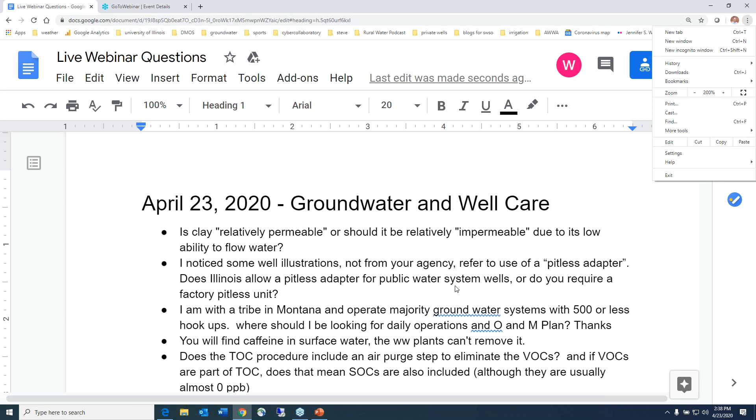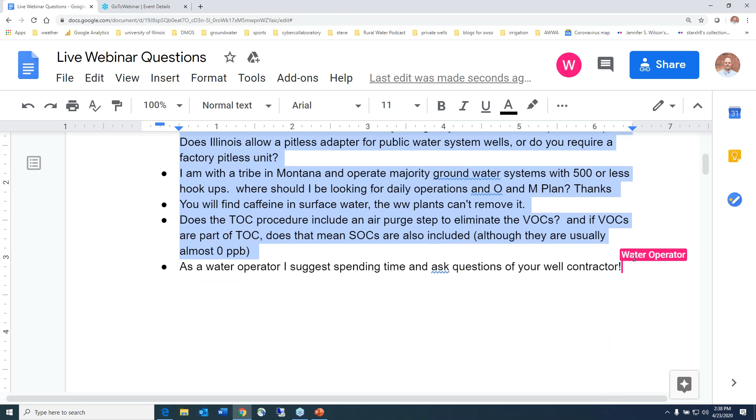I noticed some well illustrations, not from your agency, refer to use of a pitless adapter. Does Illinois allow a pitless adapter for public water system wells, or do you require a factory pitless unit? Dick, that's for you, because I have no idea. Sure. Yes, Illinois does allow pitless adapters for public water systems, and they do require that they be factory manufactured. There's really, I think, three now: Baker Monitor in Evansville, Wisconsin, Moss in Roscoe, Illinois, and there's a new one out, Bosshart or something like that, that's working their way into it. But yes, you can install pitless adapters.

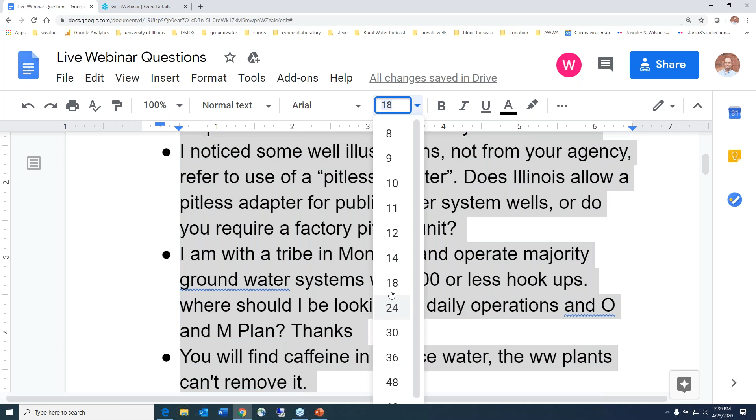I am with a tribe in Montana and operate a majority of groundwater systems with 500 or less hookups. Where should I be looking for daily operations and O&M plan? Well, I'd like to say you can probably find some of that on our website, but if you'll email us, we'll look into it. And have you talked to Idaho DEQ? Or well, I guess you guys probably don't work with them. And I can also contact MAP, or you guys are probably part of RCAC's network, and get someone back to help you. RCAP has staff in every state, so it's kind of handy. Or maybe you already work with them.

Oh, you're in Montana. Oh, okay. For some reason, I thought Idaho. I'm sorry. Yeah, if you'll email us at info@wateroperator.org, I will get back to you with an answer to that. Because I'm not sure without looking if we have any operations and O&M plans on our website. That'd be the thing to do, would be to look in our keyword search. But I'm not 100% sure without looking. So let me do that after the webinar and get back to you.

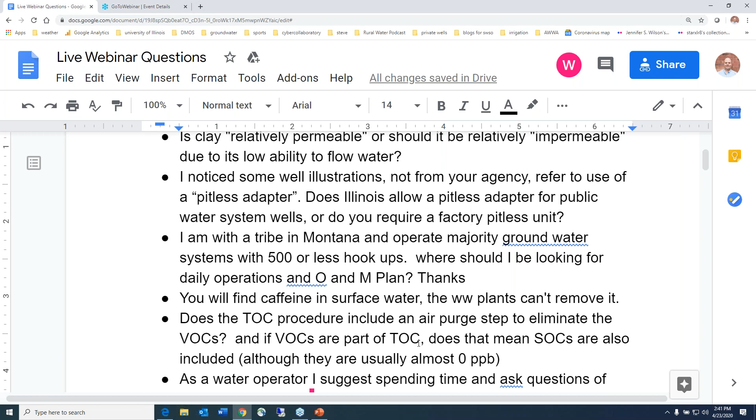So does the TOC procedure include an air purge step to eliminate the VOCs? And if VOCs are part of TOC, does that mean that SOCs are also included? Isn't TOC total organic carbon? I know VOCs are volatile organics. SOCs are synthetic. Right. Yeah. But what are TOCs?

Well, so that's a totally different thing. Yeah, I guess I don't know enough about this to answer your question. Again, if you'll email me, my boss probably can. He's a geochemist, and we can certainly even talk to one of the states to find out if there's a good answer for this. And I'm not sure what the TOC procedure is, because to me, TOC is total organic carbon, which is just a constituent, and obviously that's not right. And so I don't want to misspeak.

So yeah, email me, and or email info@wateroperator.org, and not to belabor the point, but we'll find an answer for you from someone who actually does know. In this case, probably someone from one of the states.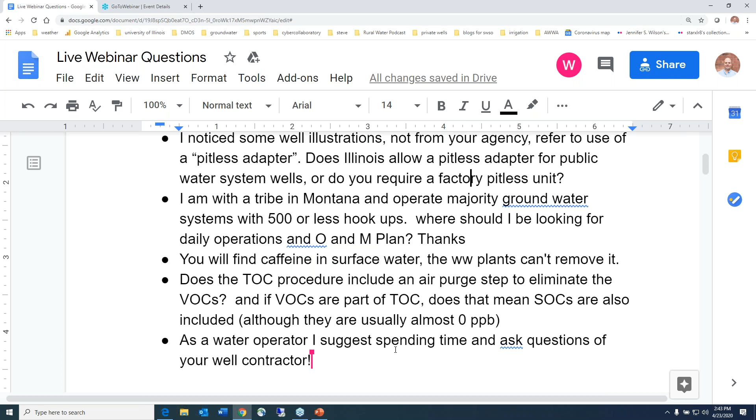As a water operator, I suggest spending time and ask questions of your well contractor. That's very good advice. And I think Dick could probably speak to the clients that are really interested in the relationship they have there versus the ones that aren't, and they only deal with maybe the consultant or whatever. Anything to add, Dick?

Yeah, just make sure, and I'm not underlying anything here, but you want to make sure that your contractor is giving you the straight scoop. Oftentimes, no matter who the contractor is in any business, they try to sell you what they have hot at the moment, and you want to double check some things.

If your well contractor says, I recommend this process here, then you ask him, well, why don't you give me some references in the area or within a certain radius where you've done this successfully? Give me names and phone numbers so I can contact people and get input. So you want to do your homework, you want to do your diligence, and make sure that you're not getting, what do they say, ice cubes to the Eskimos, so to speak.

Well, and unfortunately, that can happen. This comes up in a lot of different things, but it can happen in any business or any industry. We've run into cases where small systems had valves that were these state-of-the-art things that they really didn't need, and it turned out somebody got a kickback if they used them, and those are few and far between, hopefully, and most people have the better good in mind.